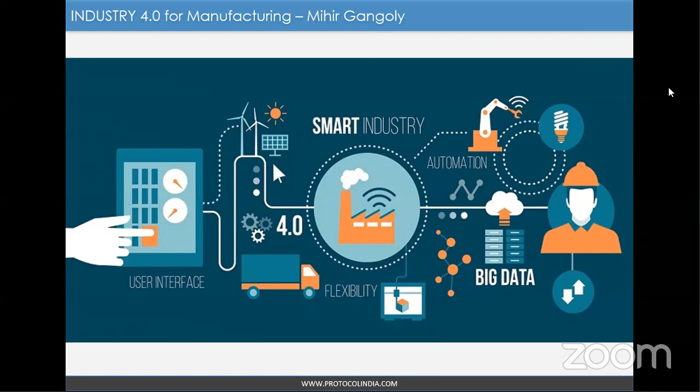Some of his most innovative technologies have been adopted by companies like ITC Foods for their Bingo chips plant, which helped increase the overall equipment effectiveness of 4 lines by integrating varied machines and departments.

Then for Tata Cummins, where he created an online truck engine line management system, which picks data from the line and creates an online manufacturing execution system, MES, which is what we are also going to cover today, to help optimize speed and troubleshoot issues during the manufacturing process.

One of the projects he's particularly proud of is with Bhabha Atomic Research Center, BARC, which provided a redundant open system SCADA software that could populate 10,000 points every second.

Another was for Punjab State Electricity Board, where they set up remote monitoring of 650 substations throughout the state using GPRS technologies, and repeated the same with West Bengal State Electricity Board and Madhya Pradesh State Electricity Board.

In 2001, he was recognized by the International Association of Business Leaders as a leader in bringing low-cost software automation technologies to small and medium manufacturing companies, allowing them to also benefit from using online quality and automation systems to improve manufacturing standards.

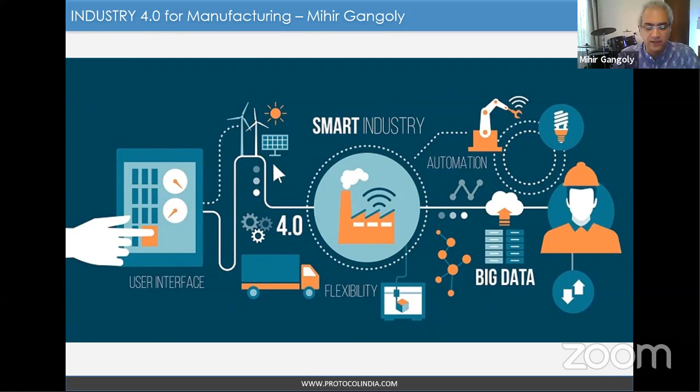Basically, I run a company called Protocol Automation Technologies. We are an industrial software solutions company with close to around 3,000 clients in India, the Middle East, and Canada as well. Headquartered in Bangalore, we basically focus on solutions that are application-based rather than writing code from scratch.

One of the reasons we took that path very quickly was because we realized we could deliver solutions quickly to customers and make sure the necessary support and structure was in place. We spent a lot of time beginning with visualization and control systems in 1994. India was new to the concept - most factories were not comfortable having a computer actually control their factory. So those were the energy points when we began. That was where we specialized, and we still specialize in that space.

We do a lot of OPC, which is OLE for Process Control - a communication standard that's used, as well as offer certified training, Industry 4.0 consulting, and IoT consulting. We also build IoT devices. One of the learnings we've had in the past 13 years of implementing it, before it was called IoT, was to realize IoT devices are not necessarily off-the-shelf boxes, and need to be customized many times for a client's needs. We work with a lot of embedded companies to build these for automation, advanced metering infrastructure, energy, and different types of things.

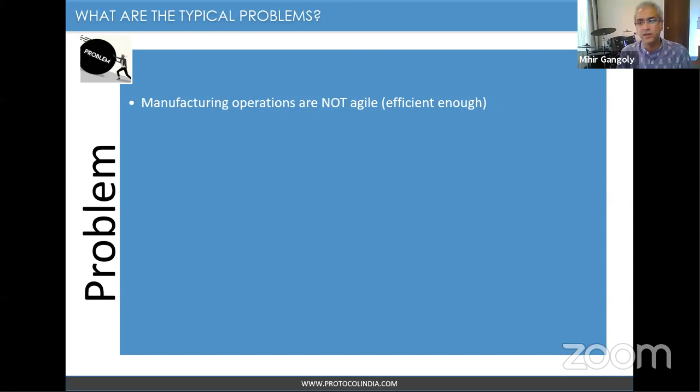So if you're looking at what Industry 4.0 should be focusing on - what really are the problems we're facing that should be taken care of? Basically, if your manufacturing is not agile, it's not efficient enough. That is the first point which I've been sharing.

Second is, if you have a poor response to changing of your process - if something goes wrong, events change and you can't respond, you get delays in actually supplying material. Customer requirements change suddenly - can you change effectively, quickly?

Market conditions change - okay, COVID comes in, what do I do? Can I optimize? Can I still produce? Equipment failures - these are important points. People spend a lot of time on large equipment failures and forget the smaller ones, which actually also create downtime and production downtime.

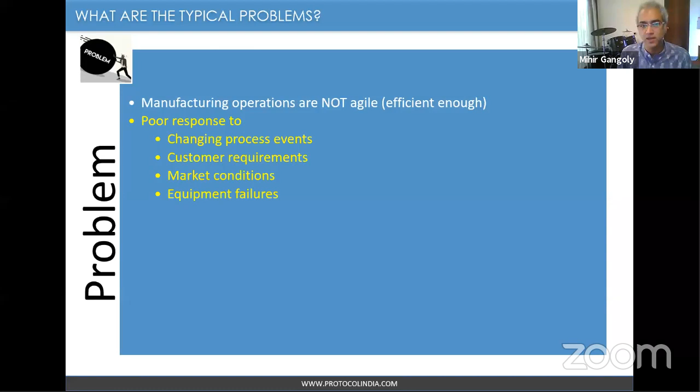So very important - if these are the things you're already facing, then Industry 4.0 is what you should be looking at. Something that we've always missed, and though some of us are active in it because we believe in it, is key performance indicators like overall equipment effectiveness.

What's my machine doing? Is it really efficient? I bought a machine, I spent 50 lakhs buying that machine. I spent 5 crores buying a machine which does specialized activity. What is it? Is it really giving me the output that it's meant to give?

And those measurements are critical because when I go back to the OEM - I'm working with a German company or a Japanese company that I got in, or an Indian company for that matter, Indian companies are also creating these types of machines - am I really achieving what I thought I'll achieve when the guy came and sold it to me?

And not only for machines, but also to look at - am I doing it for departments? Do I know my departments are efficient enough on production? Is the plant efficient enough? Is that specific line efficient enough? So it's very important to look at measuring this. And what we all forget is my labor.

Without them, I can't even run. I can have as much automation, but I still need someone to start, switch, flip it on. And you need someone there on the shop floor. It's important to understand I can measure their performance as well, understand do I need to help them. So these are things that are missing. If they're missing with you, then Industry 4.0 is something you should be focusing on.

ERPs, people have invested on software for ERP, and they have these things running. The missing link is basically people type data into the systems, consolidate data over a week, push that data in. And then you're realizing these values are not necessarily real and could be adjusted to fit in. So ERP, though it's a business system, does not really give you the output because you're not really seeing real-time data from the shop floor into business systems like that.

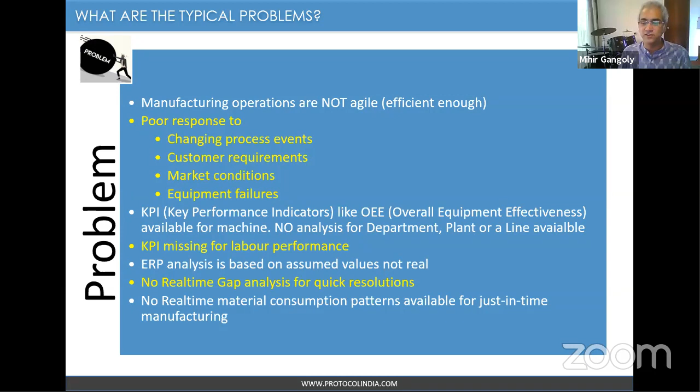So Industry 4.0 focuses on this, and the way it does this is simple. It has one simple coined word: digitization. It says bring everything to the IT systems, try as much to automate. That means if you have physical machines that are doing jobs, make sure that they can be automated as much as possible. Of course, automation is not a cheap process.

Buying sensors and installing them are not cheap. But even then, if you're looking at manual processes, try to make sure that you can capture data from those locations and understand what they're doing at what time so that you can understand your whole process. So digitize as much as possible. If you're looking at manual processes, then make them web-enabled, use PCs, tablets, smartphones to capture data. If the machine can't give me data, the human being can give me data. And thank God we have touch today, everything becomes simpler. There's no need to type data anymore.

Everything's available by just someone clicking something on a screen. Make it web-enabled. One of the reasons for web-enabled is to make it very, very light on the shop floor. Make it so light that it's easy to enable any type of system. You could have a Linux hardware running which just has a browser, and you should be able to capture data from that location. So without putting too much pressure on people to buy large, expensive infrastructure, there's potential when you use web technologies to do this.

Next, they focus on abolishing the pen and paper. What they mean by this is that Industry 4.0 pushes you to try not to write and read stuff from documents that are there on the shop floor. We normally have paper moving right across the factory. We go to most factories, even the most modern ones, and we find that they'll have a file on the shop floor, which they'll open up, which would have come from the purchasing department, and then the planning department, and they'll have all of these documents there, and they need to put it up. They normally pin it up.

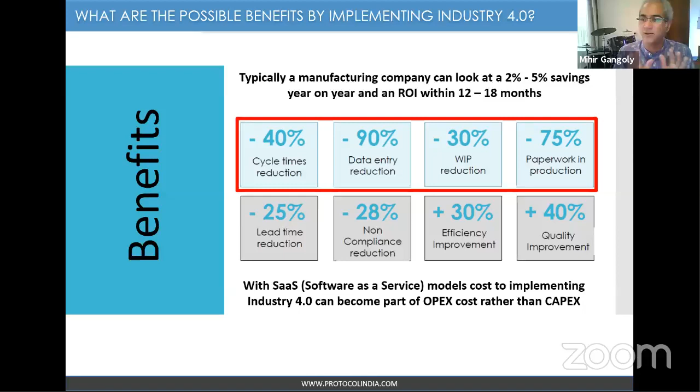Work in progress, WIP is work in progress reduction, 30% work in progress reduction straight away. That means you get to know where things are and where they're moving, and therefore you know exactly what needs to be done. Paperwork reduction, minus 75%, nothing on the shop floor anymore, everything vanishes.

And all of these lead to the bottom square that I'll be sharing here, which is straight away 25% lead time. That means now I know 25% of my time I can be accurate in terms of delivery and what I need to do in terms of even ordering as well as delivering.

Non-compliance reductions drop by 28%. The major factor is 30% efficiency improvement can take place, which is huge. And finally, it impacts the quality, therefore less rejects to market. So what does this mean is basically, if you digitize, all of these benefits straight away come to you.

And in terms of ROI, what would that mean? Okay, if you're going to spend money to put up an Industry 4.0 setup, what would it mean? Typically, a manufacturing company can look to 2 to 5% savings year on year with an ROI for between 12 to 18 months. This is if you're ready to spend money.

In current scenarios, the way we are running, spending money in CapEx is just out of the question. And therefore, innovative solutions like software as a service are available. For example, we offer services like this where we want to make sure that customers are not stopping thinking ahead or innovating. They want to think new.

They want to become better. And they don't want to think, my God, I can't spend 50 lakhs. I can't spend a crore. No way. There's no way I can even spend 25 lakhs today. So when they don't want to spend that type of money, then what is the way out? Then you look at maybe implementing Industry 4.0 as part of a software as a service.

That means you're paying a monthly outflow, a per machine calculation, 2,000 rupees per machine, 5,000 rupees per machine. People are like, this makes sense. I can justify it in my OPEX because I don't need to think about large amounts of money going out and planning this.

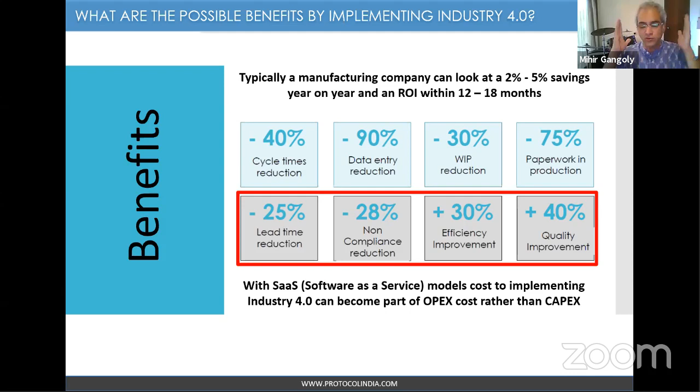So these are ways to achieve those benefits and reach those goals, which, trust me, in terms of money and returns, savings are incredible. Remember, these savings are your hidden costs - they're not seen by anybody, they're just saved by you. That means your bottom line starts increasing, giving you more money to decide how you want to position yourself in the market. So that's the focus of the benefit. Industry 4.0 straight away points you to these figures if you do the digitization and move forward.

So fantastic, the next part comes in. What is the tool that can really help me begin? What can start this process for me? I want to connect, monitor, analyze, and do a little bit of prediction - can I do all of this now? And you can. There is this technology already in place. Western countries have been using it for the past 25 years. It's called MES - that's the jargon word - Manufacturing Execution System. Basically, while you're producing, we want to know and start getting information from there to understand better.

And why is level 3 important? It's everything about manufacturing - what's happening in my manufacturing. The quality people, absolutely - that's what decides my next sale. Materials - are they moving? Where are they? What's happening to the materials? Is my stock okay? Maintenance - a very critical department that's often ignored. I believe maintenance people are important to any space. So it fits these departments and brings them into the system, but it brings them in real time. That's the difference - it doesn't just bring them, it brings them because it's connected to level 1, level 2, which is where your automation systems are. It brings the data real time to the level 3 systems and only passes relevant data up and down.

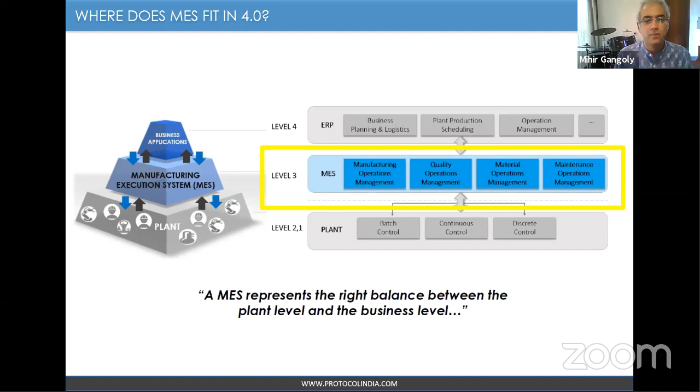So what exactly is this all about? I thought I'll go a little bit quickly into detail. If you look at production, in the production systems you have different things we do on the shop floor. We need to define our resources - what machines I have, who are the people, what type of product I'm making - then I need to know product definitions, scheduling. I want to supply the customer so-and-so, so how much do I need to produce - 1,000 units per day, per hour.

Then dispatching the product, making sure it's going through its planned cycle on the shop floor - is it going to machine 1, then machine 2 correctly? Is it being left around somewhere in a store and not being processed? Production schedule, production progress - once it's in the line, how is it being executed? How much time is it taking there? Tracking it in case problems occur, knowing where it is at what time, who's doing what on it. And finally, the analysis - whether it did what it was supposed to do, did it come out of the machine in time?

Then the quality people - involve them in terms of definition of the test. It could be visual definitions. I could look at a product and decide the color is not right, or look at a cap and see it's not capped correctly for bottle manufacturing - define those tests or measurement-related data, execute those quality plans, and make sure you do analysis. Why are products being rejected? What is my biggest problem that's rejecting products? That's the analysis part. Maintenance guys - bring them in, give them plans so they can execute their plans. It could be time-based.

It could be automatically breakdown-based. They should be able to execute it, and finally do the analysis on them as well. How fast are they supposed to do it? Do they have enough stock of materials to repair quickly? Stuff like that. And finally, the materials movement and dispatching of materials on the shop floor.

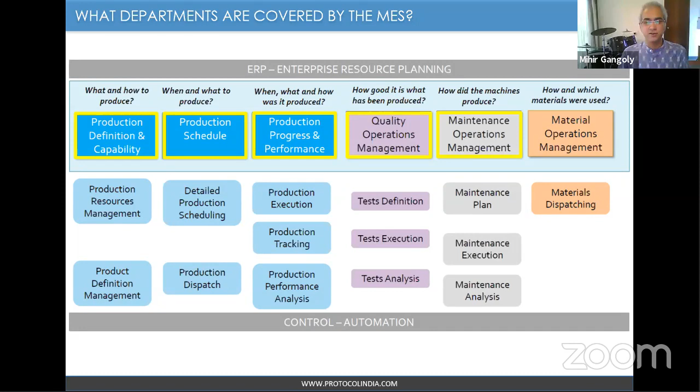So if you look at it in more detail, you have the production management module. It should be modular so that as a customer, as a person who wants to start using Industry 4.0, these technologies must be modular so that they can be picked and put in only when needed. Then, when I have more money, I plan and add those modules in, because everything is not needed now. Though you'd like everything now, costs will always be there. It's a good idea to know how to do that.

So if you look at production management, that's a module that should be there. You should have a planning and scheduling one. Preferably, the one we look at doing is dynamic. That means most planning and scheduling are done in Excel sheets, or you have dedicated software that does it. ERPs have a planning and scheduling module as well, and normally they're static. They are then released to the shop floor, and the shop floor works.

The problem is the shop floor is dynamic. Things are changing. Suddenly they planned the machine to be running 24/7, but it failed. An issue occurred. Now suddenly that machine is not available, and therefore my plan needs to change. I cannot deliver because that machine is the core machine, and because the core machine is now down, I cannot supply material to my customer. So my planning should change dynamically. I should be able to change it based on what happens on the shop floor. So dynamic planning and scheduling is a nice tool to have on the shop floor.

Material management allows me to know, in the warehouse, what material is there, what's the stock inventory, what's the movement of material based on the bill of materials. As consumption takes place dynamically, because you have the production system running, it should tell the material system that, based on the bill of materials, so much material is going to be needed for the next 1,000 pieces. And I don't think it's there in stock.

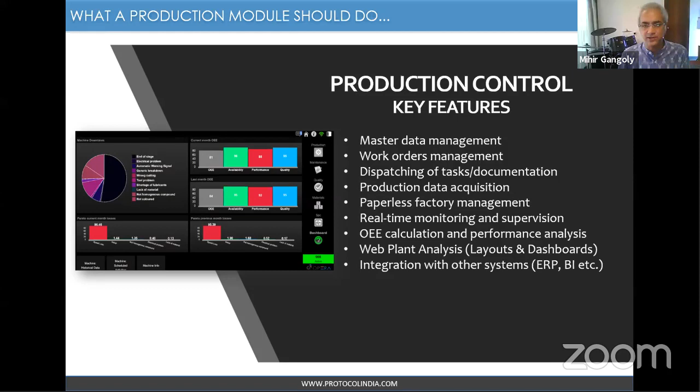Web plant analysis makes it easy for managers - like the screen I'm sharing on the left. That screen helps managers quickly make decisions and act on that information. It's web-based - we talked about Industry 4.0 and web-based technologies - which allow easy touch-based systems, even augmented reality, with large squares to click on and decide what information you need.

The systems must talk back to you. That means if I'm starting an activity, I click on it and should be able to select an operator. Where does that operator data come from? It should come from your access system. If you have a swipe card system in your company, we should integrate that system so their data is available to me here as well.

I can pop up a list of people who are actually available in your factory, not just the people who are supposed to be there - only those people will be shown here. And I can get additional data because I want to make it paperless.

I can add value to this information. If I'm a supervisor on the shop floor looking at this data and I click on an operator I don't recognize because he joined last week, I want to know if he's trained - is his safety training completed, does he know his electrical training, whatever information I need. I can click on that and get all the information related to that person right there on the shop floor using a simple browser. The goal is to have that information at your fingertips so people see this data and act on it. The more this information is available, the better performance happens automatically - you have the right man doing the right job because someone saw that information and made the call.

Similarly with machines - I could click on a machine and get to know about it. I could have a video running that tells me about the machine and its operation, so I could watch it before starting production. A one-minute video has far more value than losing that minute later, or maybe 50 minutes later, because the person didn't understand how to do it. So it's a great idea to have a one-minute video of the machine and how it operates, along with all the related drawings, available when you click that button.

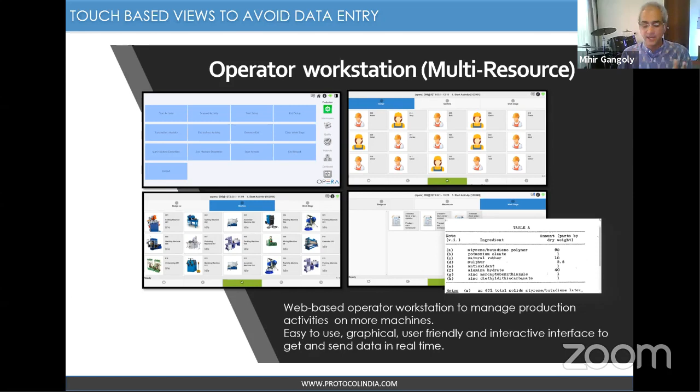So I thought this is a good time to get into a case study quickly to share with you. Devang, this might be a good opportunity for you to also look at a poll at this point.

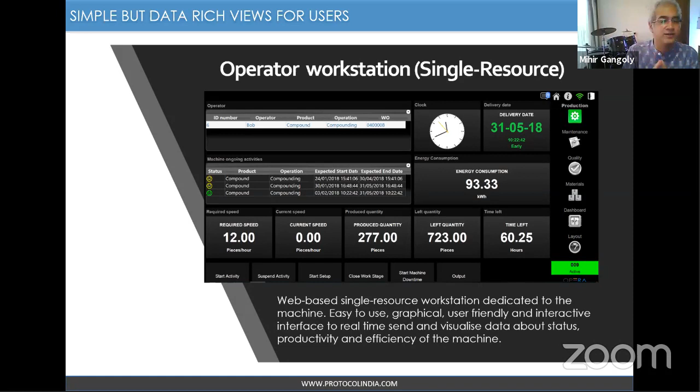Now, once you have this data coming in, whose responsibility is it? And how do I get to that benefit slide? Why can I get 2 to 5% total savings? How do I get there? It's to have this data available to the heads of companies. Remember what we're talking about, Industry 4.0 is top driven, not bottom driven up. You have to be an owner to understand that data matters to you. If you don't know that, Industry 4.0 is the wrong start. You just don't. It's better not to approach it at all.

If I'm talking to a production head, it's not necessarily he's the right person for Industry 4.0. It's the owner, because he wants this type of data straight away available, since I'm already collecting it, to be available straight to someone who can take a call, who can decide.

For example, I should have my overall equipment effectiveness. I should have the maintenance guy knowing how effective is that machine. Can we talk to the OEM and change something? I should need the quality person checking quality charts straight away. Based on a trend moving upward towards the control limit, he should react to that data instantly. He should be the one who can react to this information rather than just having data. Data has no value if you don't respond to it. So the response to this data is critical.

So whether it's OEE, how is the operator performing? If I'm looking at HR and training cycles, I want HR to be focusing on that, saying, boss, look at the operators I have. They're pathetic, they're not able to do it because training cycles are not regular enough. Can I train them more so they get better at doing their job?

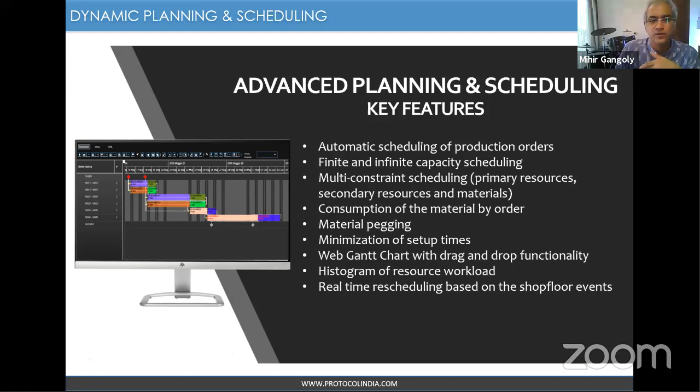So it's very powerful, it's real time, and it's really nice to use an advanced planning system that's dynamically linked to my production shop floor. Material management, goods, where they are coming to a machine, when did they come, what's the quantity. A lot of integration we do here with the weighing systems, which tell me exactly how much is going where.

One of my examples I like to share quickly is a cement plant. Again, I'm not using names because I have certain constraints, but a cement plant that was looking at packaging their cement in 50 kg bags.

The moment we gave them a system for this, they were able to understand variance in the amount of cement. They're not supposed to give less, of course, they're supposed to give 50 kgs plus. If they give minus, then they have challenges. So they're supposed to give plus, and they set up their system to make sure it gives plus. But how much plus? They had a number, and the systems were giving more sometimes.

And they were losing tons of cement. A 50 kg bag, but I have maybe 2,000 bags every day. And in a period of one year, I'm actually giving a lot of free cement to my customers because they were not able to monitor that plus. So the idea is to know that plus and understand how to make the automation system refined enough to make sure only 50 kg bags plus the tolerance I want is managed.

So having material systems is very, very important. They really help you save. See, this is not a direct saving in efficiency, but it's saving in terms of what you're delivering. So it matters in terms of the quantities that you want to be using.

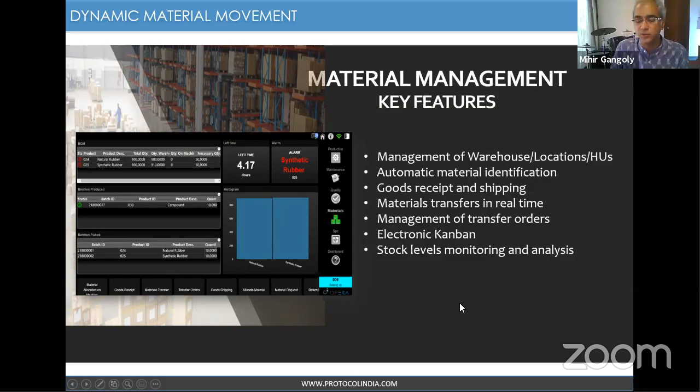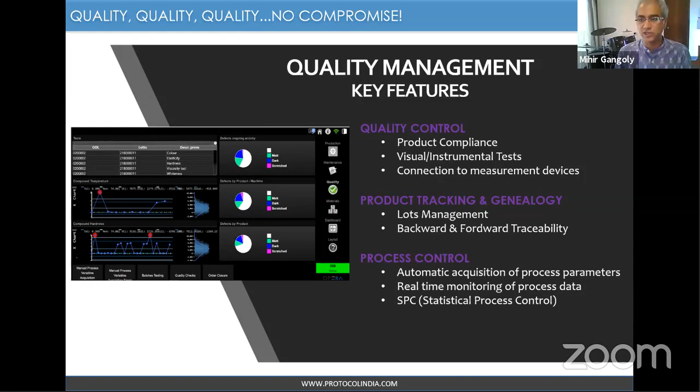Quality systems, you have a quality system that should have screens like this, which allow you to chart dynamically, pop up those charts, and then based on certain patterns, maybe alert you as well. Product tracking and genealogy, understanding the lots, the management and backward traceability. And finally, like we were sharing a little bit about the SPC and plotting that we're looking at, all of this data available simply on web-based systems.

Maintenance people also have all their data available for specific machines, having their materials and spare parts tracked and traced so that they have it ready so they can address problems in the shop floor. So making them part of the material space as well. So if you have a material space for maintenance, great. They can actually record their movement and their consumption of material as well.

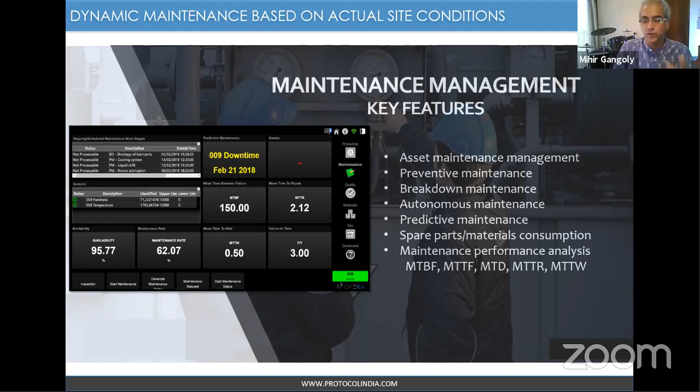The job is to look at, when you're taking big data, everybody's thinking, my God, I don't know when I'll ever reach big data, and when can I do deep learning and neural networks, and all of these jargons are there in the market. People get scared and people are like, God knows when we'll ever reach there. I don't even think I can afford such systems to really put it in place. So we're here to share with you that it's easy to do it now. There's no need to get and worry about those jargons.

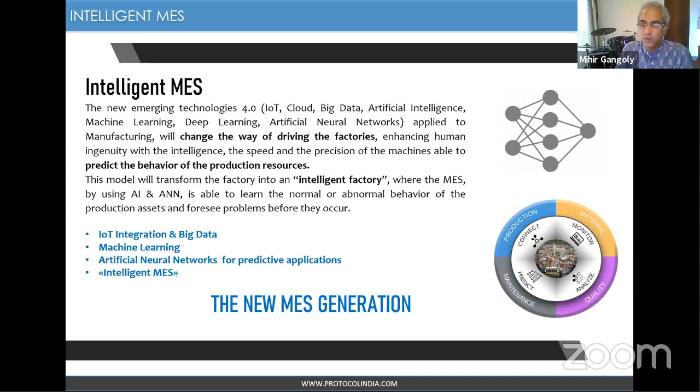Straight away, if you're looking at the maintenance, which I was sharing, predictive maintenance, that means we want to monitor parameters of an equipment that are able to tell me patterns. So if I have a pattern, let's say temperature of an equipment normally is between a certain range, and if it's within the range, I'm quite happy.

But what happens if you use historical data? So anything related to AI is about history, it's about data that's happened, and then based on that, I'm giving a thought. Okay, and if I can create a pattern out of the thought, then I can tell someone, I think you are going to cross a limit that will give you an alarm or a damage condition. And a maintenance person, you take real-time data, compile it, you weight it by doing, you add its weightage by making sure it's averaged over an hour.

It's not real-time single values, but weighted data, and you plot that. When you plot it and create a pattern, if temperature in 4 hours starts going upward, it means something is wrong, because it should not. It should normally be moving between the mean that it's set at.

That can start alerting maintenance people. You can raise a ticket automatically to maintenance saying this machine's temperature is moving upward past 4 hours, so before it crosses a limit or creates a damage condition or failure, they address it. That's the predictive nature of what we can do using simple statistical calculations like X bar charts, but the difference is using them in real time and creating patterns.

The patterns can be customized between customers because each one wants a reaction time differently. There are fast equipment where you want the reaction time to be much faster, and you want maintenance people to come in faster. So you can design that where there's vibration, temperature, pressures, different parameters on the shop floor.

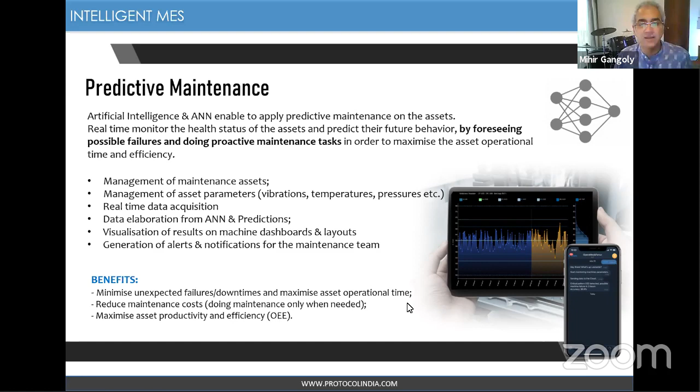Similarly, in terms of quality of the product you're producing, I would love to know beforehand. Why would I wait till quality deviates? I would like to know in real time. Those patterns can also be brought to quality people so they can know beforehand and ensure quality of the machine - this is basically what we talk about as machine capability.

If I have a machine supposed to produce a part with X diameter, with this measurement, is it doing it? Because I'm constantly measuring, if that data in real time is available and a pattern starts happening towards a higher or lower limit, I start telling quality people, please check - this machine needs to be stopped, setup needs to be changed, and then start production.

A 5-minute stop will be far more valuable than a whole batch coming out that's not conforming to quality - it means it's rejected, period. Rather than getting to a reject state, you ensure you're within your control limits and maintaining quality, which always gives you higher good quality products rather than rejects. So this is the analysis we look at for quality as well.

Before I go ahead, I guess I'll address a few questions here right now before my final case study. We anyway have only 2 minutes left, so I'll quickly address questions as well.

What changes required - let me see. Okay, what changes in the current IT software? Nikhil asked this question - what changes are really required in terms of IT, machinery, software, and stuff like that. Of course, Nikhil, this is a point of discussion because CAPEX is a challenging scenario.